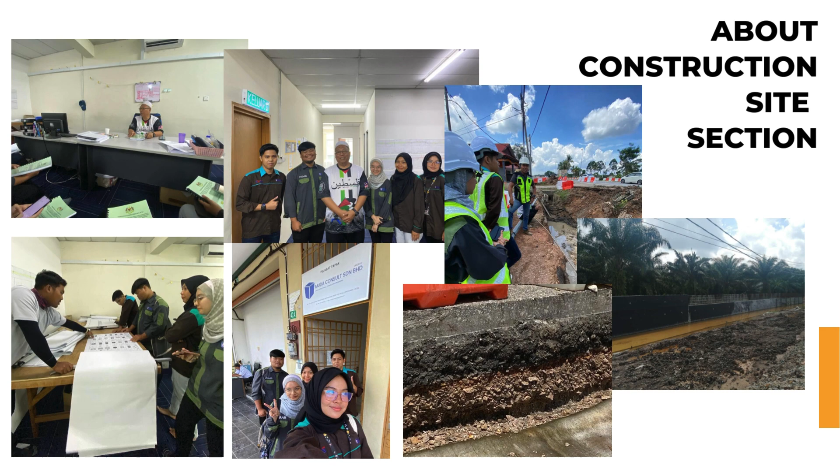For the introduction of our project, the concept of sustainable construction represents a departure from conventional practices that often prioritize short-term gains over long-term consequences. It encompasses a comprehensive approach to building that is environmentally friendly, socially and also economically friendly. At the heart of sustainable construction lies an extreme commitment to environmental stewardship and sustainability.

The construction industry needs to be aware that the choice of construction materials, energy consumption, and waste management directly impacts the health and also the current condition of our lovely planet, which is Earth.

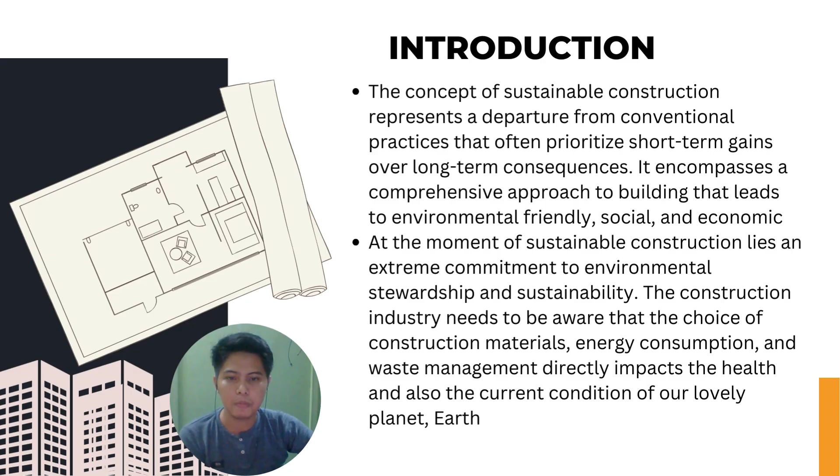Next, we move to the objectives of our project study. First of all, our objective is to identify the application of sustainability at an ongoing construction site. Besides that, we also need to obtain a work program and analyze how the project team manages in terms of sustainability approaches. The third objective is to observe the effectiveness of the sustainability approach applied in the real-life construction industry towards its effect on the environment, economy, and society, with future recommendations for improvement.

And the last objective of our project study is to implement the theoretical knowledge of sustainable construction management by comparing it with the application of sustainability approaches and construction management on site. So that's all for our objectives for this project.

Next, the problem statement for this project is that traditional practices within construction sites often result in important environmental effects like degradation, social disruption, and also economic inefficiencies. Environmental impacts are measured in construction sites by the depletion of resources and increases in energy consumption in certain construction areas.

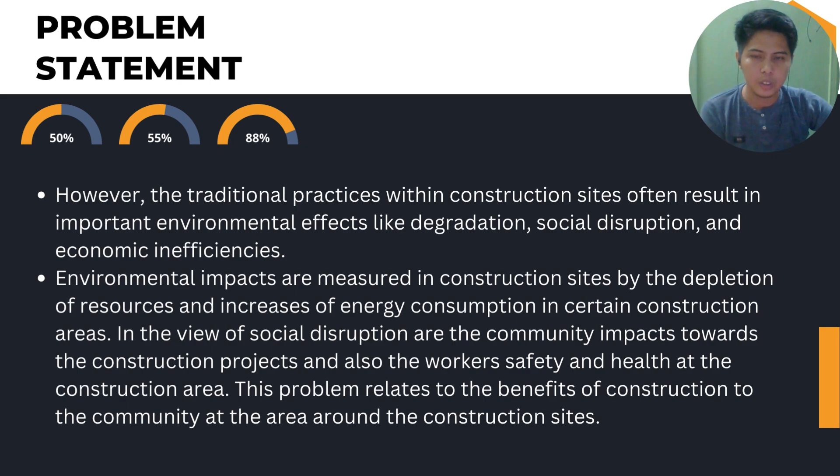In view of social disruption, there are the community impacts of the construction projects and also the workers' safety and health in the construction area. This problem relates to the benefits of construction to the community in the area around the construction sites. So that's it for our problem statement.

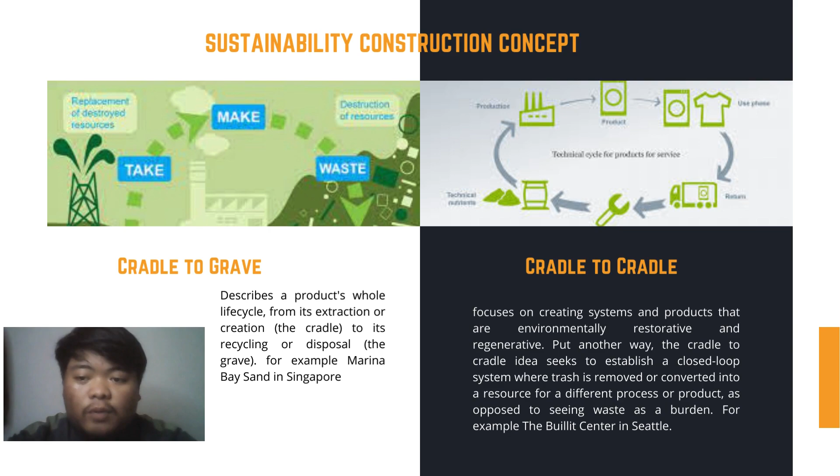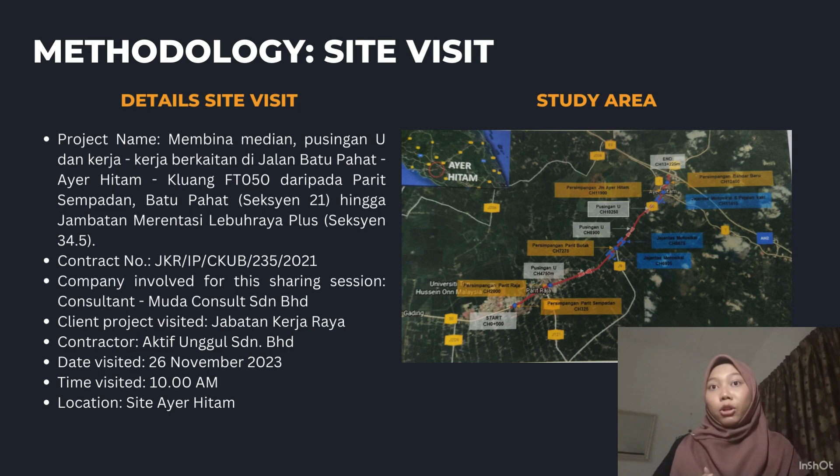For your information, our group chose the Ayer Hitam site as our study area, which is projek membina median pusingan U dan kerja-kerja berkaitan di Jalan Batu Pahat, Ayer Hitam, Kluang, FT050 daripada Parit Sempadan, Batu Pahat hingga Jambatan Merentasi Lebuhraya Plus. This site visit was executed on 26 November 2023 in collaboration with the consultant firm Muda Consult Sdn Bhd.

Now, we will continue to the procedure of the site visit, starting with a briefing and sharing session from Assistant Resident Engineer Haji Junaidi at the site office of Muda Consult Sdn Bhd. And then we go to the site visit. Before the site visit is executed, we need to wear a safety helmet, vest and shoes.

Then at the site, we need to conduct our site audit as well as a Q&A session with the clerk of work. And at the same time, we need to evaluate and analyze the sustainable approach in this project and how the company manages it.

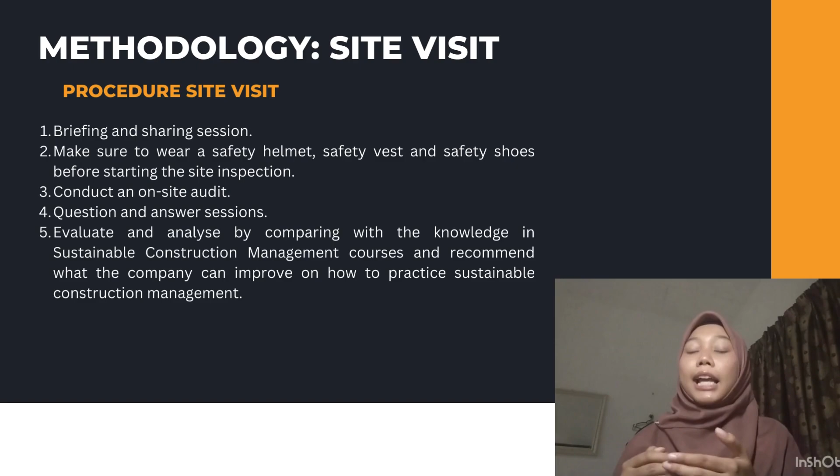And also, we need to recommend the improvement measure in the report. Now, I will share with you all about the work program and how it is managed. First, in this project, we have a method of statement that consists of details in terms of material, machinery used, and also the manual for operation.

According to the work program that our group got, one of the activities is ground improvement, which is already mentioned. The techniques used, such as remove and replace, geotextile and surcharge, are in the method of statement. All the methods used are to reduce settlement so that the result, which is the road constructed, is sustained.

Therefore, the contractor, with advice from the consultant, must play a role in the method of statement in terms of material selection, machineries and procedure in order to minimize impact to the environment and give benefit to the community. We continue to the next point.

In this project, each construction activity will give impact to the environment. Therefore, environmental quality monitoring is executed, which refers to the environmental impact assessment as guidance and is controlled by the environmental management plan. Every 3 months, the quality of water, air and noise was measured. This project also has a waste management plan, in which construction waste will be transferred to the dump site.

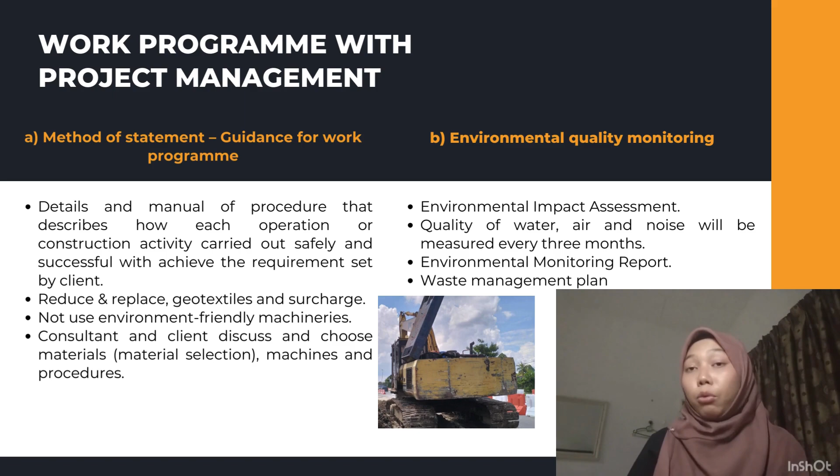We will continue to the next management of work program. This project also has a work program structure, in which the activities were organized in the schedule. The purpose of the work program structure is to ensure the project completes on time by providing satisfaction to the client.

Besides that, the S-curve has two categories, which are physical and financial S-curve, that help to monitor the progress of work and know what the current cost remaining is. The S-curve helps the project team to construct within the budget and complete on time while giving the best quality, and most importantly a product sustained for society's needs.

Lastly, the non-conformance report (NCR) is a record of client complaints where a process, product or service does not meet the standard specification. For example, the utility relocation work which uses old street lighting posts that will be outdated. During the audit session, the client and consultant play a role to give suggestions, which at the same time encourage the contractor to implement a sustainability approach, but still not exceed the estimated cost and give the same outcome.

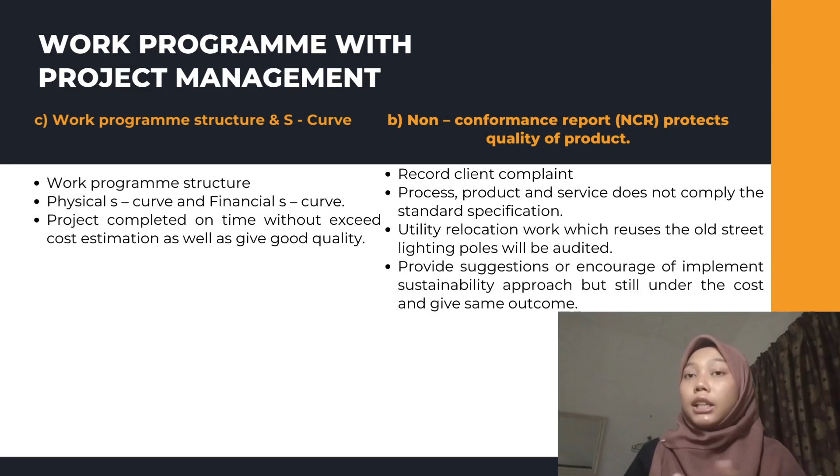I will present about strategies or application of sustainability approaches on the visited site. The first point is reuse materials, alternatives for waste management. Using pre-existing materials is a sustainable strategy that makes an important contribution to resource conservation and responsibility towards the environment.

In this project, the company will reuse the old street lights. It can consider refurbishment and repurposing projects instead of eliminating old street lights. Using elements of old street lights, including poles, fixtures or wiring, facilitates their incorporation into new initiatives, lowering the need for raw resources and reducing waste.

Next, using solar methods for street lights as temporary. Temporary street lighting made feasible by solar technology is a cost-effective and environmentally friendly solution that brings energy efficiency and sustainability into consideration. These temporary installations reduce carbon emissions by using clean, renewable solar energy, providing an eco-friendly and effective lighting option for transient, urban and rural areas such as Parit Raja and Ayer Hitam.

The third point is replace sand with quarry dust. Since sand is a limited material, the company found out that they can replace the use of sand with quarry dust, which has the same function, since the price is almost the same. Quarry dust can be used in place of sand in buildings, which has a number of benefits for the environment and useful engineering applications. Quarry dust is easy to find.

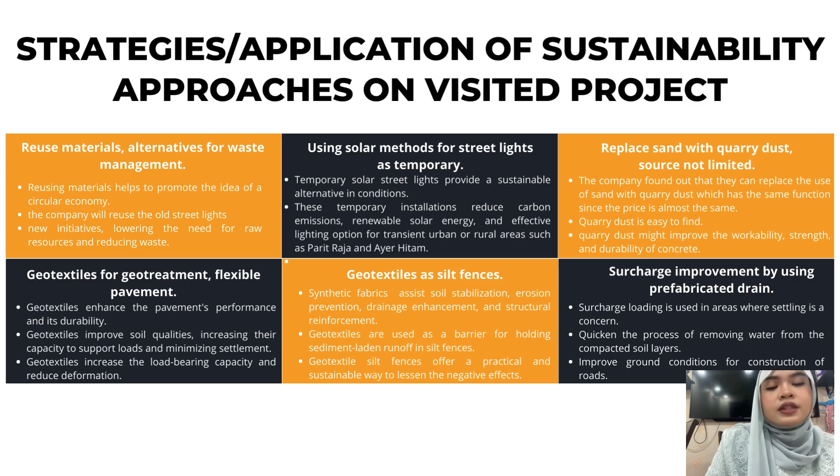My name is Nur Adrina and I will continue the presentation about the comparison of sustainable construction between theory and on-site. The principle of sustainability that can be found is to use recyclable resources and maximize resource reuse, and based on our site visit, the construction reuses and reduces existing soil from the excavated soil for ground treatment, and uses prefabricated vertical drains (PVD) as geotextile layer and silt fence, knowing geotextile is one of the environmentally friendly materials.

Next, applying the principle of life cycle cost and economics, the project reused existing electric poles and closed culverts to function as walkways for pedestrians. The next principle that can be found is waste prevention and management, as they did drainage work before road work to hold and collect extra soil from road construction, providing a dump site, and also designed some to manage other waste produced during construction.

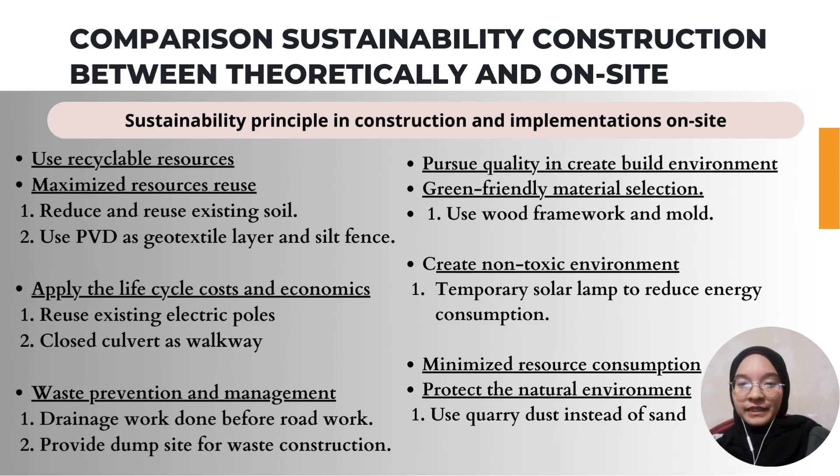Moreover, pursue quality in creating built environments and selection of green-friendly materials. Based on our site visit, there are many material selections such as using wood framework and molds, especially for retaining walls and molding. Another principle is creating non-toxic environments, such as using temporary solar lamps to reduce energy consumption. And the last principles are to minimize resource consumption and protect the natural environment, as the project uses quarry dust instead of sand, reducing new sand taken.

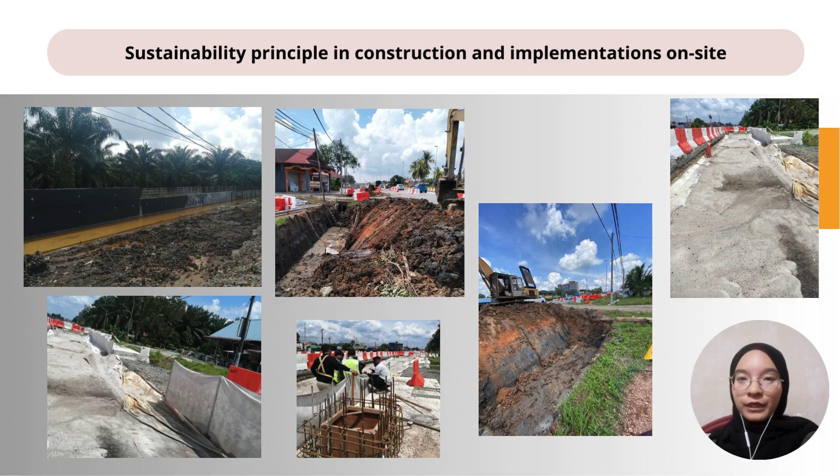These are some of the examples of implementing sustainable construction for the road construction of Jalan Parit Raja to Ayer Hitam based on our site visit. Next, we propose some recommendations to improve sustainability in construction management based on this project we visited. First, select steel materials for framework and molds because steel is more durable than wood. Second, adding geogrid as a soil reinforcement layer. Next, the walkway on top of the closed culvert can be pavement or paver block.

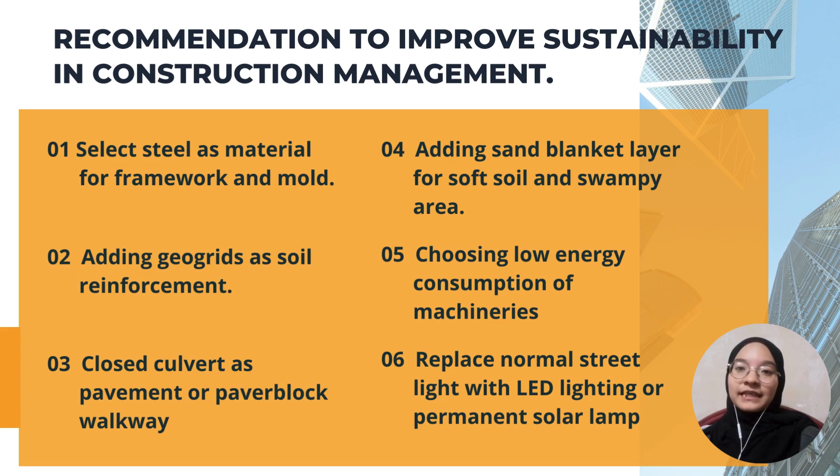Fourth, adding a sand blanket for soft soil and swampy areas to sustain the environmental impact in future. Next, choosing machinery with low energy consumption, as it will reduce carbon release and produce less air pollution. The last recommendation from us is to replace normal street lights with LED lights or permanent solar lamps to reduce energy consumption and increase sustainability for environmental and society needs.

So lastly, the conclusion of this project is the advantage of implementing sustainability in road construction, which is our project study. It can provide environmental protection, cost savings, and improve road durability and the road's service period. The use of these sustainable construction techniques often results in a well-built road of higher quality than conventional road construction methods. But the lack of budgets and material supply can be one of the causes that makes sustainable construction not implemented by other firms nowadays.

This factor should not be the stopping factor for the company in implementing sustainability in construction, but those limited materials can be replaced with materials that can provide the same positive effects to the environment and also give benefits to society and to future generations.